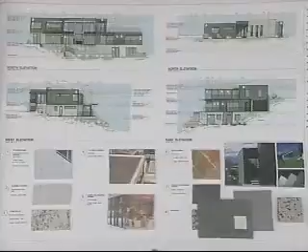Is this kind of what they call a matte finish? Yes, and with weathering it gets less shiny as it gets exposed to the sun. Was the amount of metal surface area reduced, or just the color changed? Just the color. We did look into other options, but it seems like this is the way it's going to work out. For now, it seems to be a good balance between concrete and siding, kind of an equilibrium right now.

Take that. Oops. Anybody else want to see this? Pass that. Here's the reference one.

Let's go to the drainage plan or the landscape plan. Talk about the next issue. Drainage would be there. Those are actually back in this direction.

As far as the remarks from the minutes, we have taken both the existing pipe that was on the surface as well as all proposed pipes, and now they are below grade for your request. In addition, everything is now, sorry, we're looking at the erosion control plan.

It's a very similar looking document. This is what we need to be seeing though. Is it? I haven't seen how this set was assembled, so forgive me. Here, there we go. That's the one. It's right there, grading and drainage plan.

In any event, getting the pipes below grade, everything is now called out as Santa Barbara sandstone for the riprap, and the cistern is now placed in the mechanical room on the bottom level. So I think we've identified that. So this is a hard bottom cistern.

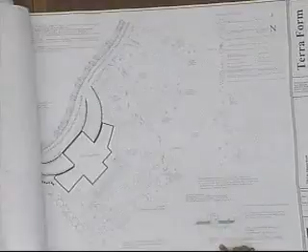I think that's a good presentation. Anything else you want to go over? No, unless you want to go over the details. Why don't you walk us through the detail sheets? It's sheet 5.

Exterior light fixture, they're down, and those are typical details, but I guess the ones the board would want to see would be the siding details. So we addressed all of the location connections with siding and concrete, as well as the sliding doors and windows with double stud walls and siding and concrete walls.

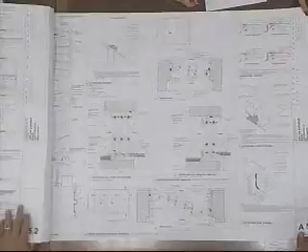We concentrated on resolving all the waterproofing issues with exposed concrete walls and sliding doors.

This is the overhangs that we show in the front of the residence, the pre-manufactured overhangs. And that's about it.

Okay, where does this happen on elevation again? All of the overhangs are going to be done in a similar style. Some of them are fixed and closed at a different angle, but the ones on both sides of the fireplace on the second level are going to be fixed at 45-degree openings. And the front entry has a completely closed overhang.

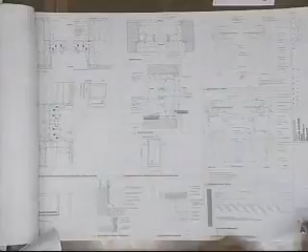Okay, so basically you can rotate those little pieces at different angles and control that. Yeah, follow. Great. Alright, well thank you.

Let me open up public comment. Is there anyone from the public wishing to speak on this project? Seeing nobody, I'll return it to staff. We received a letter in opposition from Paula Westbury.

Okay, so go back to the board for questions of the applicant. And if there's no questions, we can just go straight to comments since we've seen this before.

Is the system connected to the cistern, or is that being used for something else? No, we have not connected it to the cistern at this point in time. We plan to. So what is it being used for, the water from the cistern? The purpose of the cistern is actually just to choke our post-development runoff back to pre-development levels. It's a stormwater management BMP, essentially.

But the possibility exists that you could pump it up and certainly use it for irrigation. It's just with local rainfall patterns, as we know, there's a very good chance what you'll get is one tank full a year of useful irrigation water. So whether it's really worth pumping it back up the hill, I leave that to the board and the owner. Okay.

Anybody else with questions or comments? If not, I'll entertain a motion.

And this motion would be for final approval. Mr. Chair, I'd like to make a motion for final approval for the architecture. Did we look at the landscape? We're okay with that? Architecture and landscape as submitted.

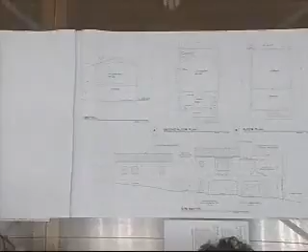Let's see, we've got our 23 feet height. We developed the covered patio to the south with a flat roof that mimics the existing residence. It's a heavy timber built-up roofing, quarter and twelve pitch. What we've done is reapportioned the interior ceilings to accommodate Mark's particular needs, but kept the same volume we had, the 23 feet above grade.

Eliminated a window here. Let's see, I can switch over to the other elevations. Yes, we eliminated a window here. We added a window up against the house to match the window that was to the south, opposite it.

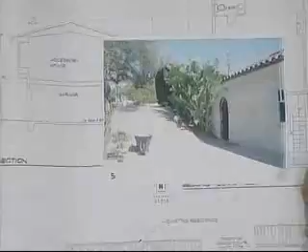As far as the colors go, we're really just matching what we've got in the house. We've picked the palette based on photos of the existing residence. There's a brown trim on the house, and we're looking to bring that up with the garage doors and the gates, carrying it through. The windows and doors would be white, just like on the existing residence.

The roof material would match the existing tile. That's an S tile. Can we match the S tile? That's what we're looking to do.

So you don't really have a color board or the color materials? I just thought, since it's existing and we're matching, the photos might do better than me trying to mimic what was out there. And the whites should get even cleaner.

Let's see, what are there other issues? I'm just thinking. I think that's it. Okay, great.

I'll open up public comment. Is there anyone from the public wishing to speak? Seeing nobody, but I always have to ask that question. I really think it's a great idea. I'll return it back to staff for questions of the applicant.

We do have a public comment letter in opposition from Paula Westbury. You can have the copy of it. Yeah, I've seen those, I think three. I'll return it back to the board for questions of the applicant. Can we see the drawings that were here two weeks ago, just to review the elevations?

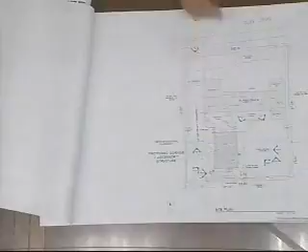So it's a little lower than would have been a real easy scenario, but I think the advantages of doing it this way also provide the ability to capture the water on the driveway and put it through a dispersion field. That works well with the ability to set the slab within the top of curb. The top of curb height stayed where it was in the garage - it was the slab that moved within.

My understanding then is that you've dropped this height by 12 inches, effectively? Yes. I was going to comment that the proportion looks much better relative to the main residence now, I think. Thank you.

So when you're out on Cliff Drive and looking down the driveway, can you show us what part of this we're going to be coming right on to? I can't really see it, actually, because it's set back. If you're on the driveway on Cliff Drive looking down, what are we going to see, and which part of this? It's actually back over here, because it's set back 7 feet from my existing house, so you're really not going to see it.

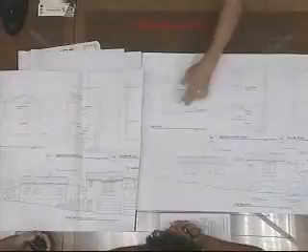We dropped the 12 inches and that stayed where it was. Then in looking at the drainage and site topography, we were able to drop the slab of the garage and reapportion the space we have. There's still 23 feet from that grade, which has always been on this plan, the adjacent grade at the point of the two-story mass. And that's where we're taking it.

So if we look at the site plan, what's been a constant is this two-story mass. That point right there, that grade, has been what we've been using to determine the height of our building.

So what we did was we took the ridge, we dropped it 12 inches, and then these slabs were dropped also. Those interior slabs went down 12 inches. And then we just reapportioned where do we want the floor level.

That was up to Mark. He took the plans home and said, I'd rather have this height here. Basically, rather than having a two-car lift in the double-car garage, he's going to use just a single lift in the higher single-car garage. It has a higher ceiling. So he gave up some desire for height in that double-car garage and put it back in the second story.

Okay, any other questions from anybody else? Yeah, Mr. Miller. He brought up a valid question regarding the S-tile. Is there a policy, or do we match the S-tile if it's existing?

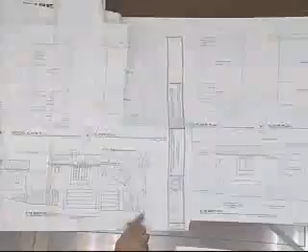I'm looking at this drawing, which gives you a 24-foot dimension off of the lower grade. Now it's 23, which is fine. So I understand the building went down, but then I go back to the section, and this is 23 when the grade is higher, somehow. It's actually higher than the 188, which is here. And you still got 23 feet to the ridge.

I'll tag on to what you're saying. It baffles me too, and it's really weird that we make such a big deal out of 1 foot, and that goes for both of us.

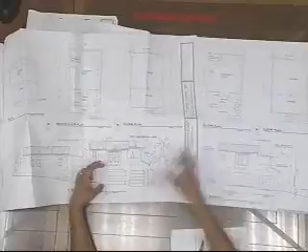This says it's 10.5 feet from the apron to the finished floor, and this is going to be 10.5 here, but we know this is 9.5 feet because the section shows that it's 9.5 feet. Then this element, which was 8.5, actually grew by a foot, so this building got taller. I want to say the proportions—there seems to be more mass here, or what we're trying to do is diminish the mass.

We're trying to bring it down. From my perspective, it's a secondary structure, and the secondary structure needs to have smaller, humbler ceilings. We don't put 10-foot plates or even 9.5-foot plates when we can make an 8-foot plate fine for a second-story volume, scissor truss it up. These are my comments only, but I understand what was happening here, and I want to call it: I'm not comfortable with it. I'm wrestling with it.

Comments from other board members? Mr. Chair, kind of following up on that, I would be very comfortable if the second floor plate height went back to the preliminary drawings of 8.5 feet. I think that's what we generally asked to do. The building being set down is a benefit, but the exposure of this building hasn't really changed.

We'll give you a moment to speak. What he's commenting is you've got grade here, and from the back side of it, it was 24 feet from grade. But from this side where the elevation is, this is still the full height. The same building mass from the driveway side is still the same.

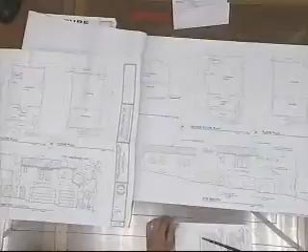There was a statement at the meeting that said we really don't care what you do inside the building as long as you drop it a foot, because there was this discussion about where the plates were. That was the comment we took home, and we dropped it a foot, and we apportioned the plates, and so we didn't realize, because it was simply stated.

That's okay. Comments from other board members? Mr. Chair, Denise. Well, I remember looking at the site section on A2.0 in the first iteration, and I think that this is a big improvement. As far as the apparent height of the building, it did drop.

The proportion to the main house is much, much better than it was, I feel. I mean, yes, there is probably room to lower it another foot because it's a tall ceiling upstairs, but they did effectively do what we asked them to do.

Discussions? Anybody else? Mr. Chair, I'm comfortable with it. I only have one minor suggestion.

In your section here with this scissor truss, make it a full stick frame. With a structural ridge beam. Yeah, I think that aesthetically would look better.

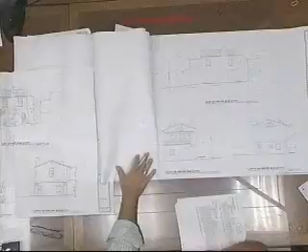May I make a comment? I think your original design was a better look. The lower windows are not traditional windows of that style of architecture. It also looks a little funny to have the roof vents sticking right on top of them like that. That was traditionally not done.

I agree with Brian's comment about the windows. As for the height, I don't know how to fall on that. Generally speaking it doesn't bother me, but I see what you guys are coming from, so I think there's room to reduce, but I'm kind of on the fence on that.

Can I go in on the windows? I agree, I don't think they're appropriate for this structure. I think that first iteration was better. And just a minor thing about the windows too: these windows are clear without mullions, and these have mullions. As long as we understand that and we're okay with a solution, that'd be another comment we can make.

What does the original house have? Does it have breakups? It has breakups. Yes, okay. Kind of the mission style with it.

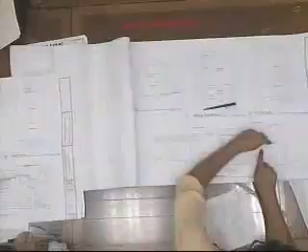There's this roof below and the stair that wraps around it, so this terrace got smaller. Oh, here it is, this 15 feet. Before, they had the whole roof area as a deck, and we made the comment of them pulling the deck back, which they did to this point. That's our guideline, is to have second-story decks 15 feet away.

And I'm glad you asked that question to clarify that.

So what is the board's direction or decision for the project, and how do we want the project to move forward? Do you think we need to take a vote on whether we're okay with the second floor plate height? I'll take a straw vote on how many board members are okay with the presentation as it is today, the height of the building the way it is shown in this set of drawings. The height is one foot lower, but then they ended up lowering the grade so they can still get what they need inside. So vote now?

Vote now. Who supports the project the way it is right now? So there's three members... Well, technically I'm only supposed to vote when there is a tie. So if you're three and they're two, you're really the hinge. What about your vote? Technically I should only vote when it's a tie.

The motion I had — what is that elevation? It is to remove this window here, which is on the south elevation, and to restore this window to the original rectangular, more traditional form with lights, on the north elevation. And this motion would be for preliminary approval? Yes. Okay, making neighborhood preservation findings and all that stuff? Yes. And then would it be returned back to consent for final?

Yes. Okay, did we see the color board already? The color board would be same, match existing. What about windows and doors and garage doors? We can tag that on as soon as someone seconds the motion.

Is there a second to that motion? Yes, I'll second that motion, Denise. Okay. Will the maker of the motion, Brian, be okay with adding a comment to provide notes on the plans describing the existing building materials that are being matched?

Yes. And then at consent, bring a cut sheet of the garage door? Yes. And a cut sheet of all the exterior light fixtures? Yes. Is there any other discussion for this motion?

Maybe add, what sort of chimney cap or top is going to be proposed? Well, this is an appliance B-vent flue, so it's just a fake — none is required, it's just a gas appliance. But there's a spark arrestor at the top? Well, there's not even that. It's just a clay pot with plaster in it and a drain hole. So that's what you're looking at — really a plaster top with a faux terracotta pipe sticking up 3 inches. Okay.

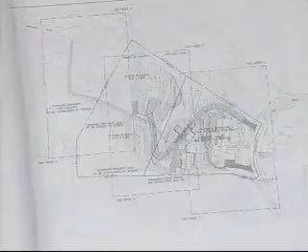By phasing, we mean the overall scope of the project, which includes 4 structures, will happen at different periods over time. They're not all going to be built simultaneously. In terms of landscape clarification, as Kathy mentioned, anything proposed in terms of landscape from this new property line uphill will be included, and you'll have the opportunity to review that prior to the grading permit being issued, which would be the final review for the project. Anything downhill of this property line is being addressed by the civil engineer with some permanent erosion control measures in the form of jute netting, shown here on this plan.

And that can stay for 20 years if that house never gets built? Actually, the time frame, I don't actually know. I would have to clarify, but I don't think it's 20 years. All right. Okay.

Going back to the landscape phasing, there was something about oak trees, that they're going to be planting a whole bunch of them. There needs to be an irrigation plan. Will some of those oak trees be occurring in the lower parcel of land? Right. Okay, but that will be reviewed later. Yeah. All right, I think I understand it.

Do we have any other questions? We can go to comments and then a motion. Mr. Chair, just one clarification question. Has there been any changes to grades since we saw it last time? The building's moving, changing dimensions, tweaks and driveways? No. Footprint and floor elevations of all the structures are the same as what you saw at preliminary review. No positioning of the buildings have changed, road elevations haven't changed, and no manipulation of terraces to regrade anything? Mm-mm. Okay. Okay.

Mr. Chair? Bernie. Regarding that netting, could you explain, are you asking right now, even though the 4 properties aren't going to be developed yet and they're going to be phased, we're already working on 2 houses on one of the lots, but you're wanting approval now for all of this to happen at the same time as the first part of the project? That got me concerned. So is that what it's going to look like, or will there be other mitigation to move it along, or could it actually stay like that for years?

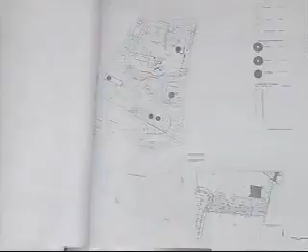This is the neighbor's oak, basically. Is there an easement along there? Is that what's going on? There will be a utility easement on this parcel, but what's not shown in these drawings is where that easement occurs. It's known that easement needs to come north of that shared property line in order to not impact that oak tree. So the easement will not be right along that property line. Oh good, okay, that handles that. It'll be uphill. Okay, great.

Just one more question, Mr. Chair. As part of this grading, how many of the non-oak trees, there's eucalyptus trees there, there's a lot of trees there, are they all going to be cut down, or what?

Which trees are you asking about on the lower part of the lot? There's an existing eucalyptus grove south of this line, it will remain, and within that some of the oak tree saplings I mentioned will be planted. Most of the trees uphill, aside from those shown on this tree protection plan, will be removed as part of the grading.

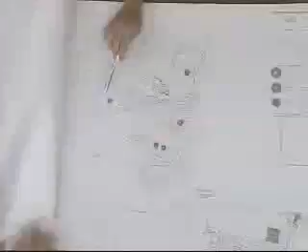So Arcadia Studio is pretty clear here in terms of these trees to be removed. The remaining trees that aren't shaded in this darker color are meant to stay, some of which are oak trees being protected according to Bill Spiewak's arborist report. So just 5 trees are going to be removed? Yeah.

I have a question. How does the city feel about eucalyptus trees? I know in the county they're concerned about high fire risk, that eucalyptus trees can be torches, and they're actually encouraging removal of them. Does the city have a policy on eucalyptus trees? I don't believe we have a policy, but I know we have the same concern about high fire areas. I think in the past they've cleared some of them, separated the trees a bit in that whole Eucalyptus Hill area to reduce the fuel. But on the other hand, we have to remember that trees in certain parts of town, even eucalyptus trees, belong there and have been there a lot longer than we have, and aren't hazardous. That's true.

Well folks, would someone like to make a motion, or should I float a motion? Float. I was also told I'm not supposed to be doing that as often as I do. But I will float a motion for final approval of the grading and drainage only, carrying forward all of the comments from the previous meeting, with the understanding that no grading will occur on site until after final landscaping has been approved by this board for both lots. That's the motion, if someone would like to first it and second it.

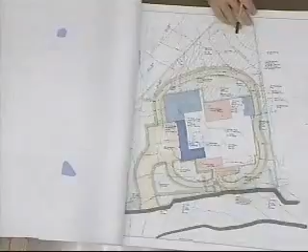So the modification hearing officer said I was free to move forward. But the building is slightly different than what you saw. The configuration now saves much more of the existing house. The walls in white are existing, and the additions are smaller, saving much more of the existing structure.

We are still relocating the existing garage. The existing garage was here under the existing house. We're now doing an addition down below that is there—unfortunately, sorry about the bleed through—adding this little portion and converting what was habitable space down below, some to new garage, some to storage area, and an elevator up.

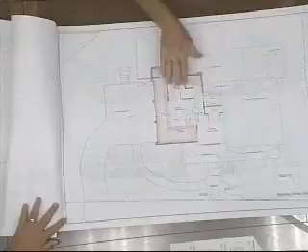With that, we were trying to maintain the architectural approach we had and keep the spirit of what we were working on before, simplifying it a little. I don't know if you remember the previous building, but it had a porch that wraps around at a lower slope, then the pitch breaks and goes up to a steeper roof, bending at a 45-degree angle around the front, which was a little problematic and complicated. I think it works much better to change it to a square corner there instead of that 45-degree wrapping porch.

We've also, in order to keep the existing walls, dropped our plate to 8 foot for much of the house, only stepping up as the lot rises to the back for our new master suite addition, where we step up to a 9-foot plate. As the building steps up the hillside, we reach a 9-foot plate for the master suite in back. We'd also talked about maintaining white space above the arches, and since our view is down, I'm dropping my spring line to a 6-foot height, letting the archway work up from there to maintain a bit more space. It was a little tighter before.

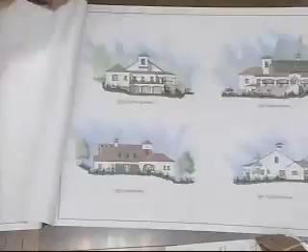There's actually a piece of property behind ours that isn't ours, but we have an exclusive use easement to it, which is wooded, and we're maintaining it as wooded. That's this little piece back here, with open space beyond. So there really is no one back there behind us. There are houses here and here, but this area is quite wooded and you can't really see through there either.

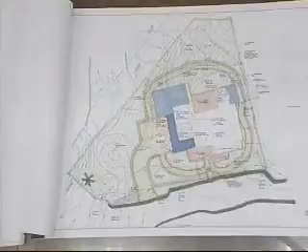We've scaled back a little bit on the paved area, trying to keep as much of the site available for landscaping as possible, and working a path that works around the building, but trying to minimize the paving on the site and keep as much green space as we can.

We straightened out the road since the existing edge is kind of convoluted. This dash line represents what was the front of the roadway, and my thought was to straighten it out and make a rational line along that edge. It goes in and out currently, and my thought was to work with Public Works to straighten the front of that road out.

In terms of the minutes from the last meeting, we definitely wanted to save those 2 redwood trees, and we talked a little about that. We are still removing 1 redwood tree out in the front here, but we are going to save the 2 redwood trees to the back of the property.

I think in terms of our revisions, we actually had our numbers wrong a little bit, and the proposal is really to demolish 564 square feet of the existing house. It's a little more complicated than that, because some of the habitable space downstairs is being converted to garage, some is converted to storage space, but basically 564 square feet removed and adding 723 square feet for a proposed total of 3,172.

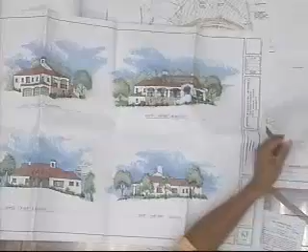So we were somewhat more elongated before, but we've compacted the new structure a little bit. I guess I had a concern with the overall ridge height, because if you kept with the 8-foot plate, it's making the house look very tall. Even this side elevation was kind of scaring me, and I apologize for using that word, but...

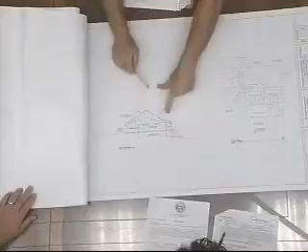I want to just say what I'm looking at here, and I think the board should review this. In order to simplify the roof structure, instead of hipping the building all the way around and having multiple roof forms, we've decided to run a simple ridge down the middle here and scissor truss up. Our existing roof height was here, and the new scissor trusses would come up like that. What's this height? I forget — it's in your elevations.

7 and 12 pitch, so that we get good solar efficiency. Approximately 24 feet.

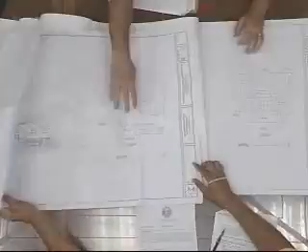Do you have a roof plan in the old set of drawings? I do. It was significantly more complex, and the ridge broke much earlier with a low slope running all the way to the back. So I'd broken the slope with a steeper slope at the front of the building, and there were some board members that were a little concerned with how that would work.

Let me borrow your scale. Sure. And that's like 19 feet, did you say? Mm-hmm.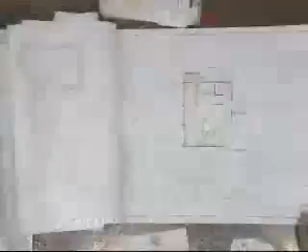Okay, are there other questions for the applicant? I would say the garage area, I understand these are two garages, and behind here was that storeroom and the elevator area. So is this a roll-up door just for this, so it looks similar, or are there going to be plans for bicycle parking? You need a roll-up door there because you can't put a car there? What's the thinking behind that? It's kind of a workshop area, to work on things and bicycle parking and all that sort of thing. And rather than converting to a man door, it just seemed much more logical to maintain the rhythm of 3 doors down below.

All right, I asked my questions. I have a couple of questions. You go for it, Bernie.

Thank you. Tony, is it okay for people to cut down redwood trees, or when is that going to fall into our new tree ordinance? Is that tree in the front setback? About 1 inch of it is, according to this document. I think the ordinance says at least 50% of the trunk has to be in the setback for the city Parks and Rec to get involved. So it's really up to this board. Technically, it's not in the front yard setback, so it's our board's purview on whether or not that tree gets removed.

The proposal before us changed a little bit so that what the public has isn't really what we're seeing right now. It'll be our comment that it gets updated and revised, but based upon his discussion, the conditioned floor area was reduced, but now he's counting some underground storage area, so the net is an increase, even though the actual size of the building has reduced. Verbally, that's what he was concerned about, how the public is getting the information, and everything needs to be accurate. All the floor area over 5 feet tall should be included in the FAR. It doesn't matter if it's conditioned or garage or house. That's why the FAR is larger, because now I am including that storage area.

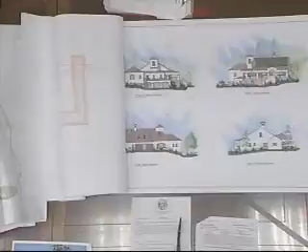I'm having some concern with the overall massing of the project. The previous drawings that we looked at last time had more roof lines at a lower level that intersected before this main mass came up, and it also had different roof pitches, where they were lower in some cases. What the roof lines that I see here are all like 7.5 or so, which are very tall for this style. In particular this east elevation here is reading very massive. It seems like the way the project is being designed, the whole roof is coming off in order to put this scissor truss back on. Yes.

So there's opportunity to do things with the roof to make it less massive. In addition to that, I think the tower, particularly over on this elevation in the west, is even adding to the massiveness of that roof, and it probably could be integrated a little bit better to not protrude so much off that side. But I'm having difficulty with the massing of the project in general.

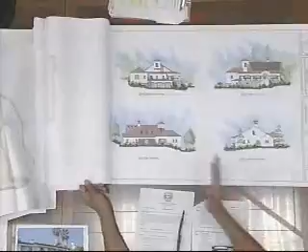That's in addition to studying the redwood tree, looking into that. Bernie, do you have anything, or should we go straight to a motion?

Okay, Mr. Chair, may I just jump in about the redwood tree? This project was here before, and there were specific comments in our minutes about the trees in the rear yard to be maintained, but not the front. Correct. So the majority of the board before was comfortable with that direction. So I personally am fine with, he's retained the redwoods in the back. The front, we'd love to see maybe some other landscaping feature there, but to me personally, that's not a make or break deal there. Okay, that's a valid point.

Discussion or a motion? If nobody makes a motion, I get to appoint somebody. I'll try a motion, Mr. Chair.

I'd like to thank the applicant for trying to hear our guidelines and adhere to them, and we appreciate that. And we would like the applicant to return to the full board with the following comments in their redesign. One, reduce the overall height, and number two, reduce the proportions of the tower element and make the tower fit integrated into the building, make it shorter. It appears like a 3-story almost right now. And the third item is

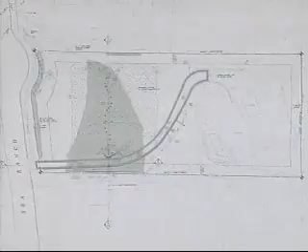So this pipe that comes from Sea Ranch will vertically daylight, and the water will move across this swale. We'll take out one row of avocado trees in the center to allow this bioswale to create a percolation area, a riparian somewhat habitat through the middle of the property, and then it'll retain itself here and perk into the ground.

Where it can't perk, it'll go into another vertical pipe that, as it did before, takes it under the driveway and daylights it here. So all this water is being bioswaled per Tier 3 on this side of the property, and on this side we've created another bioswale to create flow into this basin along this side of the drive, so we're not taking it onto the driveway, speeding it up, and dropping it in here. We're bioswaling this half and this half, including much of Sea Ranch Road, which is a storm drain that exits onto the property.

By virtue of looking at the city requirements, we've come up with our landscape plan. You look at the plantings, I think it's on the L1 sheet. You'll see how the cross-section of the bioswale is all cobble and riprap with plantings integrated, a small feeder pipe that goes into this swale that's also perking, as well as allowing the French drainage to perk back into the soil.

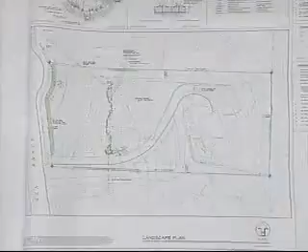The pictures I brought basically show you the conditions of the neighbor's driveway, which is again a parallel condition here. The culvert did exist previously and it still exists. We're going with this pipe back down into that culvert under the driveway. This little orchard will remain except for one row we'll take out for the bioswale. The retention basin and catch basin are down in this area, so we'll pond the water here and let it go back and under.

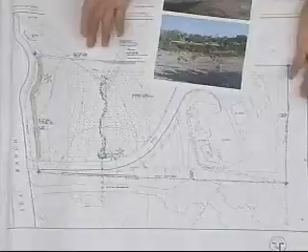The rest of the site in terms of landscape at this point is staying the same. There's existing planting and existing hedging along the driveway and along Sea Ranch. So the real condition is just the center of the property we're trying to get up to code.

Do you want to talk a little bit about the extra — is there any driveway work happening? Well, I can let Robert go into that. I think that's fine — the driveway coming up to here, we're going to have a new entrance and a new wing that I think Robert can get into at this point.

The landscape design hasn't been done for the addition to the house yet. We've been concentrating on just getting this done. We originally were told we needed to get this taken care of before we could even submit for the house, but I guess it's okay if we run the addition to the house and this at the same time. In doing that, we don't have any landscaping for the house yet, but I can go through it.

We've got 1.61 acres — it's a pretty big lot. As you know, there's an existing house. We're adding some small additions here and there on the first floor and one addition on the second floor. So the house will be 4,129 square feet. It's only 78% of the max, at 0.06 FAR.

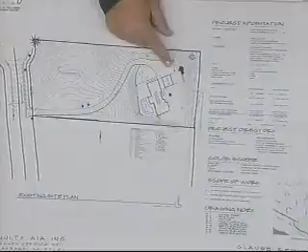This is the existing site plan, what's there now. Right now you come up and pull in here, and it's kind of awkward because there's no real way to get to the entry, which is here. There's a breezeway, but it's kind of dark and not very inviting. So our plan was to extend the driveway starting here — this will become landscaping — go beyond and pull into the garages this way so you don't see them as you approach, and then build a new auto court.

We're going to fill in the breezeway, then we're going to add a new family room on this end, and a little addition to the bath. And the second story sits about right here.

These pictures are of the neighborhood houses. Maybe Dan can explain. This is my home, the one on the top row, and that's it from the driveway. Yeah, these are pictures of the site as you approach the house, and then these are neighbors, adjacent neighbors across the street.

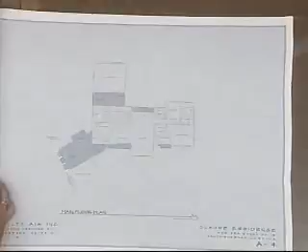And this is the first floor plan, where the screened areas here is where we're going to add to the house. We're going to move the existing kitchen from this area and rotate it because there's a nice view going this way. And this is the room they're going to spend most of the time in, and it has a nice covered patio off of it.

The master bedroom gets reworked, just remodeled. We're not adding any square footage other than for the tub. We got a new entry, and we're filling in this - there's a roof over this already. We're going to fill it in so we can gain a bedroom.

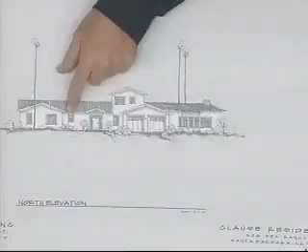And the second story, the staircase coming up, just a single bedroom with a bathroom upstairs. Some elevations - this is the new entry, so you have a little gable. We're thinking of a metal roof with white vertical board siding, new doors and windows that will be double hung, corner boards, and it'll have more of a New England shingle style feel to it.

This is the far end - it's the master bedroom on the side, and then that's the second story from the side elevation.

Do you have an elevation showing what the overall height is, or what the plate to plate is? Any information about verticality? The existing plate is 8, and the second story plate we're going to go with 8 because we can't do anything with the first story. The only place we're going to lift up is here, and this is going to be a 10-foot story. That's the wing, the new wing.

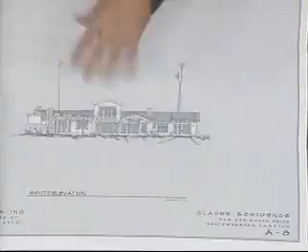8-foot ceilings are really kind of low. We're going to volume the ceiling in the bedroom to get a little height in there, and there's a current volume ceiling in the living room we're going to keep. We'll do an 8-foot plate with a volume ceiling upstairs.

And the roof pitch is 4 and 12. And this is just the other side of the house. This is the road - comes this direction. Yeah, exactly. Okay, and that's it.

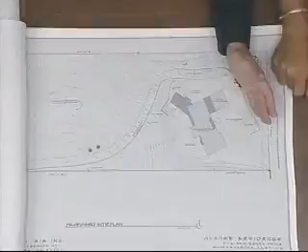Eventually there'll be a landscape plan to present, showing what we're going to do. I think this also allows guests to get to the front door area and enter through the public side. Before, all the parking was right next to the garage, and you had to go through this shuttered breezeway. So we're trying to get guest parking here instead of that side area, so they can make a nice two-point maneuver and get back out to the front door.

Or in the visible area where my guests currently park—if we have more than two people over, they all pull off right on the mulch side, which is very visible from the street. I'd say as a comment, landscaping-wise, the 5-foot-high retaining wall needs to be addressed, and that can be handled with landscaping one way or another.

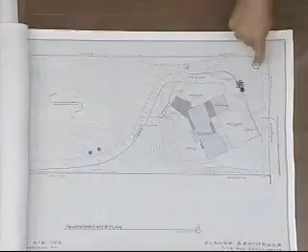Be prepared to make a good concept presentation. There's a big stone pine right here—it's very large, maybe 40 or 50 feet in diameter.

Isn't there a tree in the middle too, in that auto court? No, it's just grass, a low grass area right now. There is a sickly pine in the middle area—it's not a very big tree, just that little guy he's showing right there. Okay, yeah, it's near the front door anyway.

It's asphalt driveway right now—has there been thought as to what the materials of the drive and auto court may be from this part forward? I think it'd be nice to see some kind of permeable paver. My thoughts are gravel, or something similar—I don't think we're going to continue the asphalt. We want to make it a little more rural, a little more aesthetically friendly.

Any more comments about the project? We're not in a position to give preliminary approval, but I wanted to have a little discussion with the board members on the location of the second-story addition, the height—now that we know what the plate is—and whether we have concerns about the overall height, or whether story poles are something we'd like to see, or whether we have no concern as a board.

I think it's a very attractive addition. With a plate height of 8 feet, I don't see any reason to have story poles for something that's that inconsequential—it's not aggressive. I think it fits in rather nicely with the architecture.

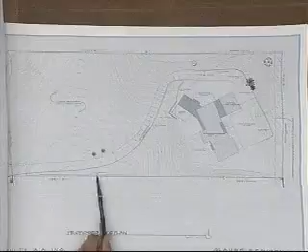It's 3 feet high? I thought it was 5. It says 3. Okay, good, it's a 3-foot-high block wall, kind of a tan block color. So it's not finished? There's existing landscaping—it's not plastered, doesn't have stucco on it. On the exposed side, there's only 8 inches of it showing on my side of the property.

I would concur with what you said, that we don't have a concern with the retaining wall, or with the solution you have here. Maybe just bring more photographs or documentation to show how diminutive this wall is, and that its finish would work if landscaped. If it's only 3 feet tall, it might not have to be finished since there's landscaping in front of it already.

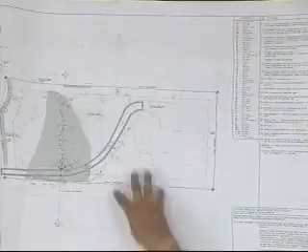But for preliminary approval, I wouldn't advise the board to give it because we don't have enough information about the landscape court, and you're missing your heights and elevations. So you're on the correct road, but it would be a 2-week or indefinite continuance back to the board to finish your design before we can give preliminary approval. That's fine, that's great.

The bioswale, I think, is very much in keeping with the nature of the area, and I've reviewed the plants, and they're all appropriate to that application.

Mr. Chair, can I go back to questions for a quick second? The second story addition, which is 400 square feet - are there any exterior living spaces attached, decks, porches, or patios? There is a small balcony on the ocean view side, and that's it. Not enough to stand out there, not enough really to have a table or chairs. Okay, that's what I wanted to know.

Well, sure. Designed, yep, it's nice. So, indefinite continuance? Are you ready to come back in 2 weeks? That's up to you - you gonna have something in 2 weeks? We're going to roll with it, it's your call. 2 weeks, not ours. We could do 2 weeks or 4, I'll do it. No, we can do 2 weeks. Let's bring it back.

Okay, would someone like to make a motion? Oh, God. Thank you, Mr. Chair.

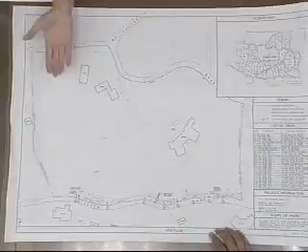About a week after, we found a dead sheep. So my husband and I drove back there, and we found that one of our neighbors had taken down the barbed wire. That very day, a dog came and killed a sheep. So we complained to that neighbor, and he apologized and said he would put the barbed wire back, but he only put one strand back. And we were panicked because we have 15, 17 sheep there.

So I went to the fire department, who said a wood fence is a fire ladder, put in a metal fence. We already have neighbors that have metal fences, and these are pictures of neighbors within 2 blocks with a 6-foot chain link fence. I went to the building department, I got the building permit. He stopped me at 95%. I have the staff who can testify to that, as well as the fence factory.

I called, they said we worked it out, put in some vines. I said okay, I will irrigate it. I called a neighbor, and she said no, they gave me a choice of 3 vines, and my neighbor said do the trumpet vines, they do really well. Here's a long metal fence in the neighborhood with trumpet vines and no irrigation. That's what we're aiming for. So we put in the irrigation. Then Roxanne called, that's fine, do it, so we did it. And now we get another call that we have to submit this.

Do you happen to have the photographs, 1 through 8? Yes, there they are. I'm just going to put them in front of the TV camera if you don't mind. These are photographs within 2 blocks of the house. Okay, those will pass around to the different people. I'm just going to go through this for the TV audience. We got a drawing down here along Siliato Lane, which is 1 through 8, just documenting the fence.

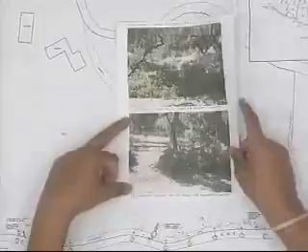This is from the road's perspective, not from your perspective, it's from our neighbor, standing on the road, looking up, and here's the fence up here and the fence up here. Most of us have visited the site, so we're familiar. This is how it terminates at the rock outcropping up here.

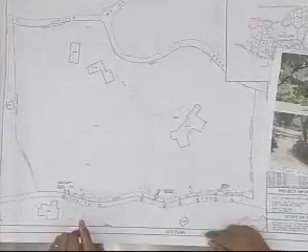Well, I think the applicant summarized it, but I can answer questions if you have any. The one point of discussion is whether this lot is bordered on a road, or is this a private lane? It's a private road, so it is treated like a front yard property, and so it has 2 front setbacks. And why is the project here for this height of a fence, 6-foot high fence? There's a specific design review trigger for SFDB for a fence taller than 3.5 feet in a front yard.

And does it matter how far back that 6-foot high fence is? Well, the front yard would go way back to the house, it goes into the face of the building. So any fence between this road and this building is classified in the front yard? Right, so whether it's 5 feet or 150 feet? Right, I just wanted to verify that. Okay, anything else you want to say?

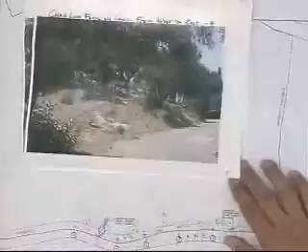617 feet. I think those of you on the board who have seen it understand the length of the fence and the length of the shiny barbed wire, I'm sorry, galvanized chain link fence.

I also have a picture of fences from Mountain up to Salito Lane on Gibraltar. They are typical for what was in the Google Earth picture, as well as the immediate neighborhood in which we all live. As a matter of fact, I might say that we represent in the back 100% of the people who are residents of Salito Lane.

That's not true. We're not going there. We're just listening to him.

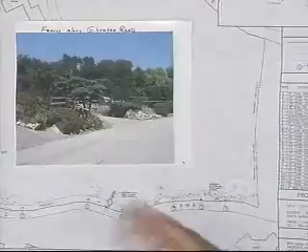Thank you. There are also a couple of other issues I'd like to bring up. One is mature oak trees and how they are being handled in the construction of the fence. You might look at this picture, which is a mature oak tree, and at the base of the oak tree on either side are poles holding up the fence.

They are obviously in the mature root system, and in discussing with the arborist at South Coast Botanical Garden, he said it could be a problem. There's another picture of the intrusion.

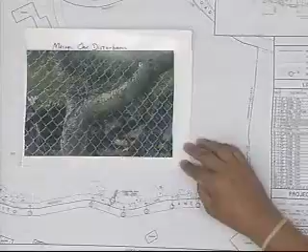One other factor I'd like to bring up is the obstruction of natural water courses, of which there are two pictures in which the fence material is down to the bottom of the water course, which in a rainstorm would in fact cause a dam.

Finally, the applicant mentioned her sheep and a need for a 6-foot fence. This is the applicant's 4-foot gate at the beginning of her property on the east side.

One final picture I'd like to put forth is a fence that was built new on the property, designed and built by the applicant. That is something our neighbors would welcome in terms of the aesthetics which you are entrusted with by the city.

Thank you very much. One other comment, and that is the cost. I read your guidelines, and costs are to be discouraged in terms of discussion, so consequently we put it in your hands as far as aesthetics are concerned. Thank you very much.

Next one is Brenda Tripp, and there are no other speakers. Am I saying it wrong? Bruna? B-R-U-N-A? Yeah, basically I just... Oh, no, I need to have you up here by the microphone, or choose not to speak.

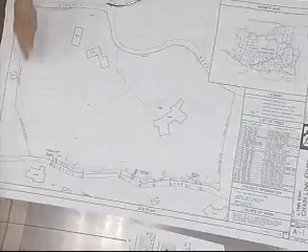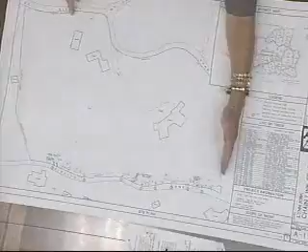Everything is fine. This is a 5-foot masonry wall or plaster wall. And this has got an electric gate here, and then it goes around here, and then this is like a 6-foot stucco wall. And this is about between 5 and 6. And these walls were here. This wall burnt down, this was wood. It burnt in the Tea Fire, and it was replaced.

Okay, I have another question, but not to you, actually, to the landscape people. The applicant has planted some trumpet vines. I drove by, I didn't really note the spacings, but they were pretty small. Can you share with us what time frame it would take to cover a 6-foot chain link fence, trumpet vine-wise? And if you think that's an appropriate vine for this location.

You want to answer first? Or? I think Tony actually emailed us about this project, and he showed us a photo. And the vine will cover probably, in a 5-year time frame, get to what was shown in that photo.

What sort of typical spacings would you... I mean, those vines will really climb far. I think the spacing that they were planted at is fine. It's just they were 1-gallon plants, so they're not big right now. So, I'm going to ask what spacing they were. 15 feet.

Questions or comments? You make comments. I personally don't feel that the vines are sufficient to mask this fence. I think that what's needed is it's well...

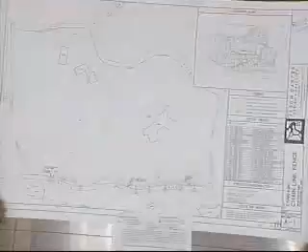And remove the existing fence where the new fence was constructed, in a moment—I forgot. Okay, is there a second to that motion? A second, okay. Under discussion.

I just wanted to say we want to remove that wood fence in the back there, but there's a really bad beehive, so we're just waiting till the bees leave or something. There's a beehive in that tree, but we will take that part of the fence down, because I have kids doing it. And we will take this down.

Okay, can I ask one question? Can I do drought tolerant planting, like agaves and stuff like that? Okay, well what do you suggest? You have some existing lemonade berry, that would be appropriate—some native evergreen shrubs. One of the things is when the fence is very linear, there can be some breaking up of the massing, and that's what the green stuff can do. It's not continuous—the vine will eventually become a continuous hedge, but then there can be something here, whether you want an olive tree or lemonade bush tree or whatever. We're not really specific on how you can address it, but there are opportunities.

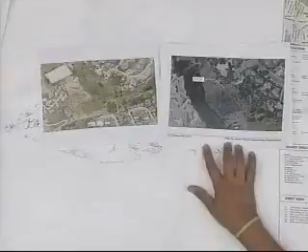Right up above the project site, we also have a fairly large home. According to the assessor's data, this is also about a 5,000 square foot home. And basically all throughout the neighborhood, we went and, even though it's a guideline, we did the 20 closest homes analysis. Dan, our planner, recommended that, and it was really helpful because we end up coming in on this project site with the third to smallest floor to area ratio of anything in the area.

We also looked at it because a lot of these homes are very large homes, but they're on much smaller lots than we've got. So I also just took a quick look at other similarly sized lots of about an acre or more. And if you look at the homes that are on those roughly acre-sized lots, we still come in within the range of sizes that are around on those lots as well.

And as you go down this hill... A little further from the mic. I'm sorry. I got one of those voices that does that.

This is a view across the project site here. And you can see the development going down the hillside, kind of very similar to what we're proposing.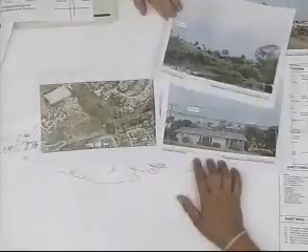So this dirt area right here is your project site? That's correct. Yeah, and the home is proposed up at the very top of the site, where we have the least steep slope. I just included a couple of other pictures along here.

This is Harbor Hills Drive right as you come up—again, fairly large homes. This is looking down Harbor Hills Drive as it goes down the hill, and all of these homes look out over that same area that this proposed home would look onto. I included a couple of pictures here of the hillside up above Cliff Drive, just to give an idea of the character.

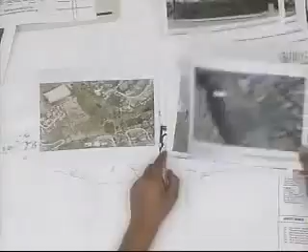I think when we get into the environmental analysis on this, they're going to be looking at views. It was sort of challenging to find a direct view of this property from Cliff Drive, but where you're able to see it, the view is generally characterized by a lot of large homes on the hillside—this would be adding a home to that, but certainly in character with everything else there.

Okay, great. So I'm going to turn it over to Mark to go through the architecture. Actually, if we can have those floor area ratios, I'll put them up here for a quick sec.

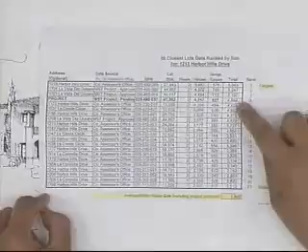Alrighty. Mark? All right, thank you. Good seeing you guys again. Basically, the Clinés' future home—we organized it to follow the contours of the land.

We looked at 2 plans. One was where we went more vertically down the slope, but we preferred going along with the flow of the land and the contours. So we're following the contours, which stretches the house out visually but doesn't stack it down the hill, so it looks less tall from someone's point of view, say from Harbor Hills Drive below. That was one of our main design philosophies.

It also minimized a lot of the grading. We've taken the house and buried the ground floor—you can see this best in the big section back here, if I can find it. Let's see, there we go, way down there. In this small section, you can see how we've really buried the first floor of the house with a retaining wall. We're trying to sink it into the land, following the contour of the slope.

On the east end, the house is really buried in terms of the east elevation, as you can see in this elevation. And of course, on the north side of the property, it's barely a story. The southern elevation—

I don't know if you guys are really interested in the plan. I'm going to talk about the southern elevation in a second, but first I want to show you the overall floor plan. I'm going to go to the first floor—this is the ground floor.

This is the portion of the project which is really buried into the hill, so it's just a big retaining wall all the way down. It's the ground floor with 2 bedrooms. We've carved out a little section of property here so at least we can have some flat ground for a pool. All of this overlooks the mesa and has spectacular ocean views.

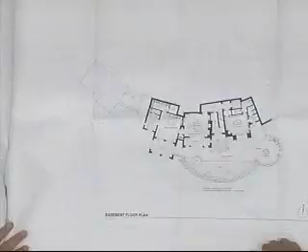The house, if you look at the topos, actually wobbles around with the flow of the topography, and the massing is broken up. That was actually a previous comment the ABR made, I don't know, 2 years ago or something—so this design reflects some of that thinking.

The next floor is actually the entry level. The driveway flows around behind the house, so you'll never see the drive, down to the detached garage at the end of the house—again breaking up the massing, creating a separate structure for the garage with a light-looking trellis that connects the garage to the mudroom and kitchen. There's a stone courtyard entry, master bedroom to the east, great room in the center of the house, and kitchen to the west, with a small terrace overlooking the view and the pool below.

Let's look at the elevations. The southern elevation, which is seen as if you were up in a helicopter because you'll never actually see it like this, reflects the curving of the property, following the topography again, and the different masses. So the Clonets liked the idea of it being more villagey than massive in terms of large chunks of architecture. So we've taken the project and actually created different roof lines, pushed it in and out as it flows along the contours.

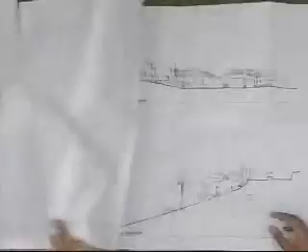Mediterranean in style, clay tile, barrel vault roof, sandstone retaining walls, a lot of foreground planting.

What's interesting to me, too, when I was studying the overall section, is that if you're actually on Harbor Hills Drive, below the property, if you were down here walking and looked straight up the hill, because the hill is fairly steep, and you drew a line of sight, the top of the pool, which is about slightly less than 6 feet out of grade, completely clips your view of the first level of the house. So I think from really down on the mesa, looking up at the house, you won't see the impact of the 2 stories.

Okay, thank you. You're welcome.

I've got a question for staff. Do you have any comments before we start public comment? Thanks, Mr. Chair. Dan Gullett, Associate Planner and Case Planner for this project.

Just a little background on this project. This property is part of the Rogers Tract, which was a map that was surveyed and recorded in 1929. In the 1970s, the city deemed that subdivision was an illegal subdivision. So this is 6 parcels from that 1929 subdivision.

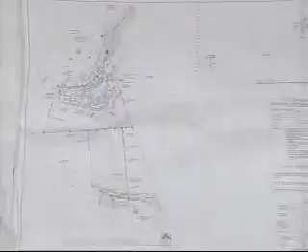Can you go back up? Was staff asking us anything about the driveway access? Not the driveway access, but the length of the driveway and where the garage is located in relation to the road. Meaning that if these 2 things are flipped and the garage was over here, we'd have less impermeable area? Yeah, that's okay. Right, excuse me Mr. Chair - you're no longer doing a separate formal vacant lot site concept review. Correct, but still, that should be the first thing that you're looking at.

Before I go through public comment, I'm going to have Glenn read the ABR meeting minutes, but this is from 2005, and so we don't know what the design was, but we can hear what their thinking was.

Okay, Mr. Chair. The motion was continued indefinitely with the following comments. Number one, the applicant has used many of the hillside design guideline techniques by digging into the hill and wrapping around the hillside with the flow of the topography. Number two, the board is concerned with the breadth and scale of the building as seen from Cliff Drive and recommends breaking up the pieces of architecture into more of a village-style scale. Number three, study the covered deck components. Number four, the board is concerned with the height of the pool retaining wall and all of the exposed retaining walls. It is understood that they be a maximum of 6 feet high and follow the natural grade. Number five, the applicant is to return with adjacent footprints and square footages of the surrounding homes. Number six, one board member suggested to study relocating the garage to the high end of the driveway. That's it.

Okay, can I comment on... How about later? We'll ask you questions. Yeah, sorry. And if you don't mind giving up your chair, perfect. Or slide that chair over there. Mark Lloyd will be the first speaker, followed by Tim Putz.

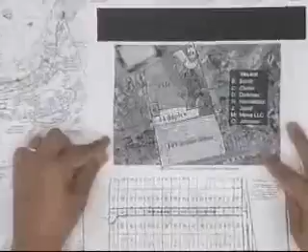This is the survey that created the Rogers Tract back in 1929, and this is essentially where we're at today. To the west of the subject property is Mr. Lloyd's project, which included 6 single-family residences, and below that, as part of that project, 14 duplexes. Below that even is the Shifco project, which is 107 senior units.

So the vacant properties that are left are signified by letters. These are all considered to be illegal parcels. Essentially, the slope density ordinance applies in this condition. This is an E1 zone, so the base lot area is 15,000 square feet, but since most of this land is over 30% slope, 45,000 is needed, and the Planning Commission has been fairly clear, at least in the reviews on this property, that they're not supportive of developments without the 45,000 square feet.

What's the size lot of these six lots? 47,000 - 46, 47. So you're greater than the 45? Yes, and I'm just saying that because you can see what the neighboring lots would be left as.

Members of the public mentioned issues of access, and the difficulty with the Rogers Tract is there are road easements that were granted to each of the property owners. So they hold easement to those roads, but it's a very steep site, and these are very small lots for the topography. So while they have easements, it doesn't necessarily mean that the city would allow access, because they still have to meet the fire department standards for driveway access to parcels.

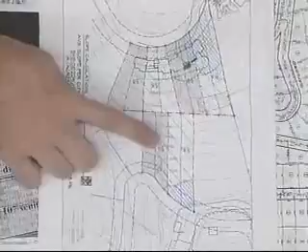I also have a graphic that the applicant provided previously that shows the slopes - it's not the subject site, but it is 5 of the parcels, and the current project. North is up still, isn't it? Yeah, but the north arrow is wrong on that graphic. In this one it's left off, and there's one added over here in the subject proposal.

So go back - the slope density, the different hatches mean different things? Yeah, there's a key on this side: greater than 40, 30, 20, and less than 20. You've got a little less than 20 right up there.

So just to clarify staff's position, we're here for comments only, and then it's going to go through the DART review, through all the different departments, and then come back here to the board for more comments before it goes on to the staff hearing officer, or? If it's the will of your board - if you're not comfortable continuing it to the staff hearing officer, then it would be returned to the board before the decision.

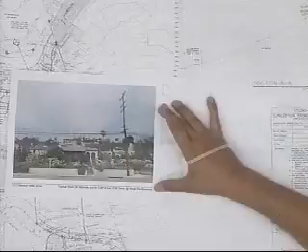This house right here, which you can't really see, really was built way too big, and it stands out from Shoreline Park. You can see it, and I just don't want us to make that same kind of mistake. Since this one is going to go right on the hillside here, I think it's very important that it not be too tall, not have too many towers sticking up, and not be too expansive, because as the 4th biggest house that's going to be up there, it's going to set the precedent, and I don't think that's the direction we want. We still want to be able to see a little bit of natural beauty on the mesa.

Thank you. There's one really critical clarification on that, though. That's fine, save it for later.

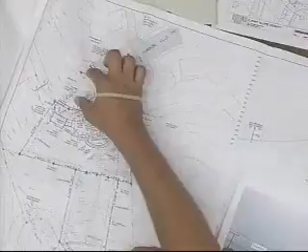The first house isn't in the Rogers tract. Mr. Chair, there's one more thing I wanted to mention about the developability of the Rogers tract right now. There is one legal lot immediately adjacent to this property to the north that was involved in a lot line adjustment, and it's below that larger white house, so there would be an additional house between. If we can look at this site plan, here's the proposed one, and here's a lot right here. So you're saying there's a legal lot right here at this location? That's correct, and you can see the footprint of the house above, which exists. So there's a potential for a home being placed here with a legal lot, and then there's this home. That's right. Do you happen to know the lot size of this lot? Is it in the 45,000 square foot range? No, it's less, I believe it's 22. Okay.

Questions for the applicant? But it is a legal lot. It is a legal lot, yes. I have a question, go for it. Is this all retaining wall right back here? Yes, sir. Would that be a hydrostatic problem, having it jog like that? No, we've done that before, and significant engineering takes that into account.

Okay, does anyone want to jump into comments? Mr. Chair, I'll take a shot at it. When the drawings were first unrolled, my immediate reaction was, 'Wow, that's a big house.' And then I studied the drawings, and it seems like it's developed in the most reasonable way, at the very top, following the contours. You took note of the comments from the previous review board about breaking down the massing, so it's more a series of smaller village-like elements. I think that's all very successful. The design is beautiful. It still feels a little tall.

The central element is at least an 11-foot plate, and it seems to be vaulted, and I think that's what's adding to the massing feel of it. In addition, we have some guidelines about apparent height of how the building will be viewed from below. And although we have 30 feet designated from a finished floor, the grading brings it all the way down to the bottom of that retaining wall, so it's going to significantly increase the visual height from down below. So I think if this element here was massaged some and the massing could come down, it would be a very successful project.

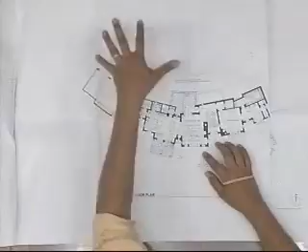One of the neighbors made a reference to a retaining wall back here. I was going to say come back with a larger scale grading plan, because I didn't quite follow all of that, but that's the next pass.

At this point, personally, I would give it positive comments that you're moving in the right direction, but by no means is it a done deal. There are a lot of things that need to get looked at and refined, but I think it's massageable.

No comment? No, that's fine. Did you? Okay, then we need to make a motion and move on.

What is your next process as the applicant? You're doing the DART review? We're going to go ahead and submit for DART for the staff hearing officer. So I think we've got comments from you today that I think are what they're going to want to look at. I think we'll be back here before we ever get to the end of that process.

Let me ask staff. If people have a concern about the apparent heights and how this is working, and if people have concerns about some retaining walls and things, does that need to get flushed out before it goes to the staff hearing officer, or are there greater issues that need to get resolved before we start fine-tuning the architecture?

So this hasn't been through a DART yet, so it will be looked at by all the divisions and departments, but I think it's in the interest of all of us that it return back to the single-family design board before it's considered by the staff hearing officer. I would recommend that. Then I would like to make that part of the motion, yeah.

One of the things we're discussing too is that something they decide could substantially change the design, like the fire department. Like we were looking at, where does the fire department go? So it could really change the driveway.